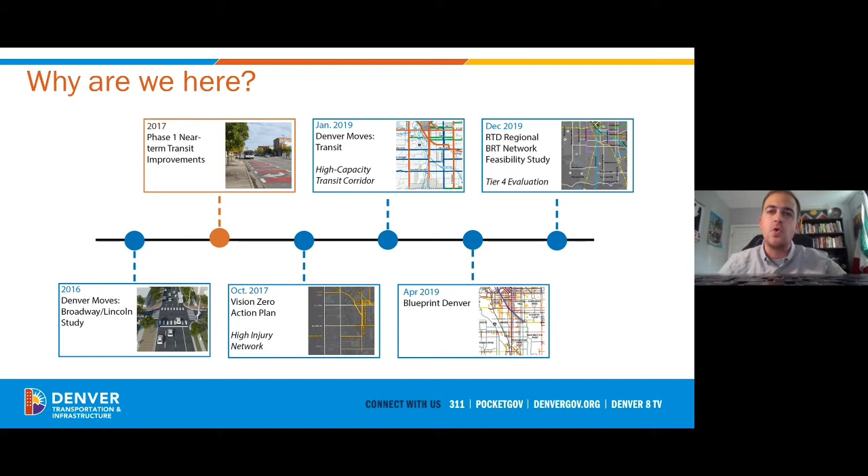With that background, RTD began their BRT study with 23 candidate corridors and narrowed them down with each tier of analysis. The Broadway-Lincoln corridor made it to tier 4, the final tier of analysis, along with 8 other corridors that were the most promising for BRT implementation.

With that, it's showcasing that there are quite a few studies and plans that focus in on Broadway and Lincoln, serving as an important transit corridor for the city, making vital connections as kind of the spine of the city. Next, we'll move into the timeline for the specific planning process, what we're calling phase 2.

I'm showing phase 1 here in orange, the improvements that occurred on Broadway in the northern section of Lincoln. During those phase 1 improvements, it was always envisioned that this section of Lincoln between I-25 and 6th Avenue would be a phase 2. So about a year ago in June 2019, we kicked off a high-level visioning survey.

That was followed by a public meeting and an open house in October, and also another, more detailed survey. That survey provided us with a lot of great feedback and has really helped shape the proposal. Thank you all for putting your time and effort into those comment boxes and rankings—they really helped us shape this moving forward.

It quickly became clear from both our October meetings and the survey results that it was time to engage our Vision Zero team last fall, to help us more thoroughly address the safety concerns being raised by you all in those comments and meetings. So in January, we pulled in our Vision Zero team.

We conducted a walk audit of the corridor, and did an in-depth analysis with the Vision Zero team using the data and what we saw while out on the corridor, along with your comments. We worked with them to start incorporating Vision Zero and safety elements. We paused the transit piece of this project, which is why it's taken us so long to come back—we put it on hold to allow the safety Vision Zero piece to catch up and be an integral part of this project.

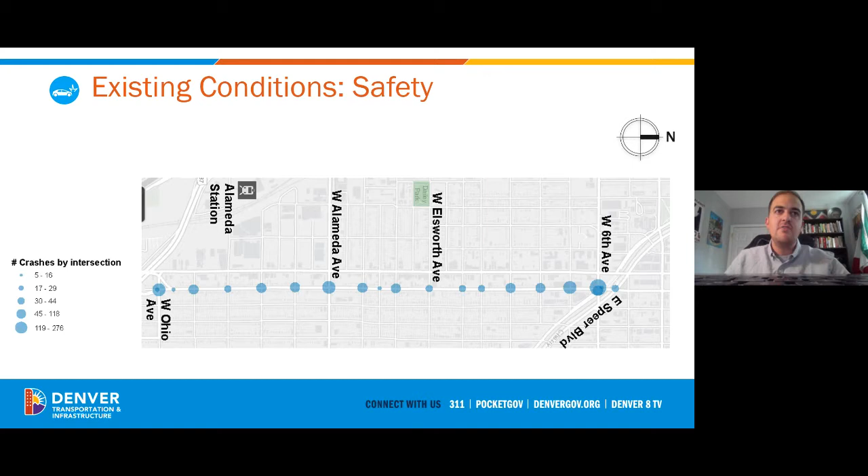Next, a reminder of some of the 2019 baseline RTD data. The Zero, which serves Broadway Lincoln, is RTD's third busiest route, serving about 10,000 riders a day. The Zero, along with other morning rush hour buses on the corridor, means there's a bus coming every 3 to 4 minutes, and in the evening periods, a bus coming about every 6 minutes. So it's a pretty busy corridor for transit by Denver standards.

Also a reminder that RTD is seeing delays along this corridor, especially in the afternoon rush hour when there's no dedicated lane, impacting riders' ability to make transfers and further delaying their journeys. It also impacts RTD's ability to efficiently serve the Broadway Lincoln corridor during peak times. Maybe not a lot of people are moving north on Lincoln at that time, but there's a lot moving south, and those buses really need to circulate and get people moving.

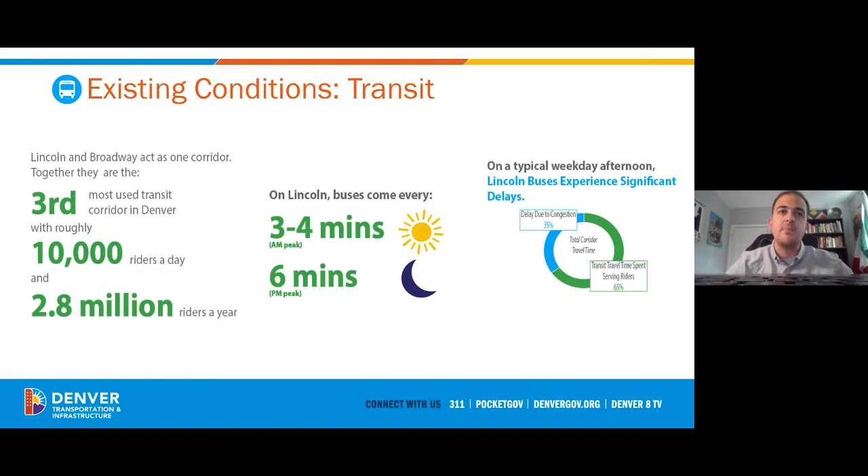Next, vehicular traffic. I added some visuals to help with this slide. It's a busy slide, but essentially it shows the traffic volume on Lincoln throughout the week, day by day. The highlight is we see a morning peak starting a little after 6 a.m. on weekdays, then around 9 a.m. things mellow out and volumes go back down. Starting about 3 p.m. on weekdays, we see the afternoon peak for evening rush hour again, and that's pretty consistent throughout the week, with some differentiation between days.

On Saturday, we see not necessarily a peak, but a steady traffic flow throughout the afternoon. On Sunday, there's relatively lower traffic volumes.

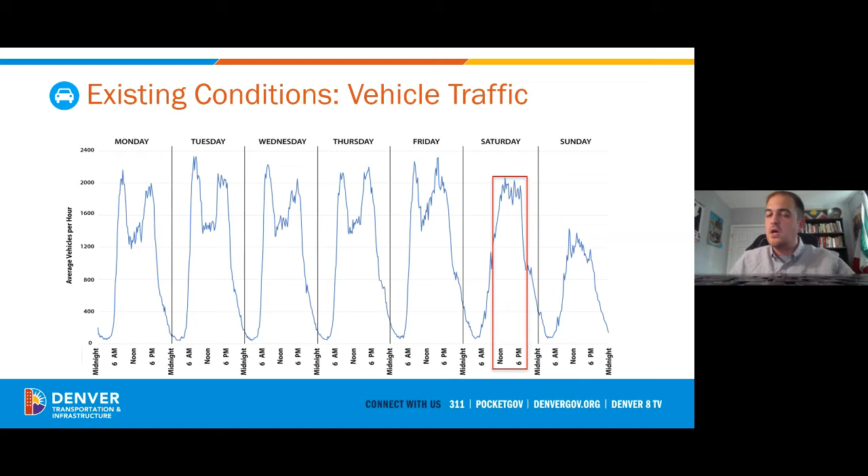Now we'll talk about parking. I'll be brief, I think you all know what's going on the corridor, but to reiterate, because this will come back later, there are existing about 247 parking spaces along Lincoln on the east side of the street between Ohio and 6th Avenue. That parking is available 22 hours a day during weekdays and 24 hours a day on weekends.

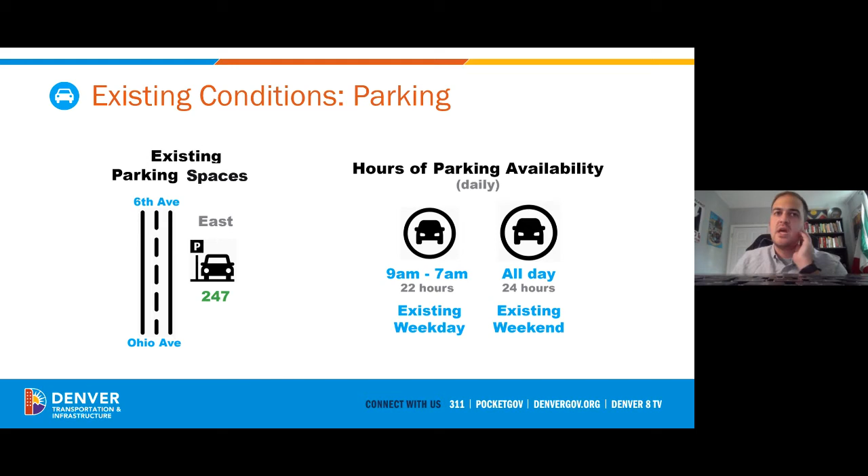So with that, I think there's probably a lot of questions coming in. We'll pause and turn it back to Gabby for some questions before we move into what we heard in the October surveys and how we're moving forward with this project.

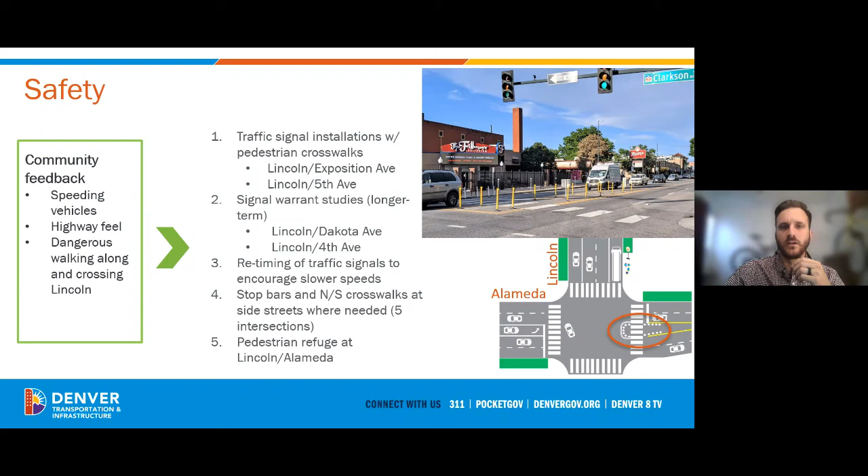Last on this slide, at the Lincoln and Alameda intersection, we had the opportunity to install what we call a paint and post pedestrian refuge at the crosswalk on the east side of the intersection, to help decrease pedestrian exposure to those wide travel lanes when crossing Alameda. This means you have a bit more of a refuge as you're crossing, so you're not fully exposed to all that pavement and all those travel lanes. If you've been in the Colfax area recently, it's similar to some of the Vision Zero improvements we recently installed there. We have a photo in the top right showing our installation from that recent project, and on the bottom right a graphical depiction of what those medians might look like.

Moving on, at 3 locations on the corridor we saw a need for daylighting. This means we'll be removing some parking spots right around the corners of intersections to establish safer conditions, better visibility for turning and crossing motorists, people walking, biking, and rolling. In some cases, we've had to do this daylighting to allow more space for motorist and bus turning movements, when buses are trying to access the side streets.

In addition, we saw 5 locations with current or developing bike and pedestrian safety issues in our crash data. At 3 of these locations - Dakota and 4th Avenue, and Maple - Dakota and 4th Avenue being where we're evaluating traffic signal installations for the long term. In the interim, we'll be installing painted bulb outs to encourage slower motorist turning speeds and improve safety for all users. When we slow motorists down as they make turns, this improves safety for pedestrians crossing, bikes crossing, and everyone in between.

An example of these bulb outs is a photo in the top right of this screen, also installed along the Colfax corridor. At 2 of these locations, Virginia and Ellsworth Avenues, we'll be installing these painted bulb outs along with some hardened center lines, as we're calling them.

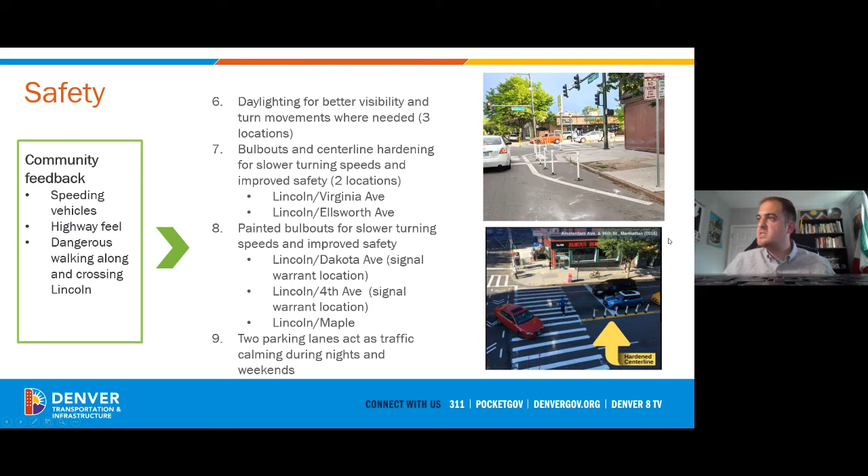Great, thanks Brett. I'll take Brett's momentum there and express my gratitude to the community for using your voice in those surveys. We were really able to use those added pieces of information you provided about safety concerns as added justification for prioritizing these safety improvements.

Obviously Lincoln is on the high injury network, but there are also several other corridors on the high injury network. With your input, we were able to show why these safety improvements should be prioritized here, and as Brett mentioned, secured additional funding for us to implement those safety elements.

Now I'll go through very high level some of the concerns and solutions for what we're calling our street operations - transit, vehicle traffic, and parking. Then I'll walk through what a typical day will look like along Lincoln, and we'll have some more questions.

In terms of transit, what we were hearing from folks is that they didn't think a 24-hour lane was necessary for the corridor - they thought it was a bit much. Conversely, we heard folks saying they wanted a 24-hour lane. We kind of presented the 4 options as they were, 24/7, here's what's on the table. So we had folks saying the 7-day condition is not warranted, please, the weekends need to be treated differently. So we definitely heard you loud and clear.

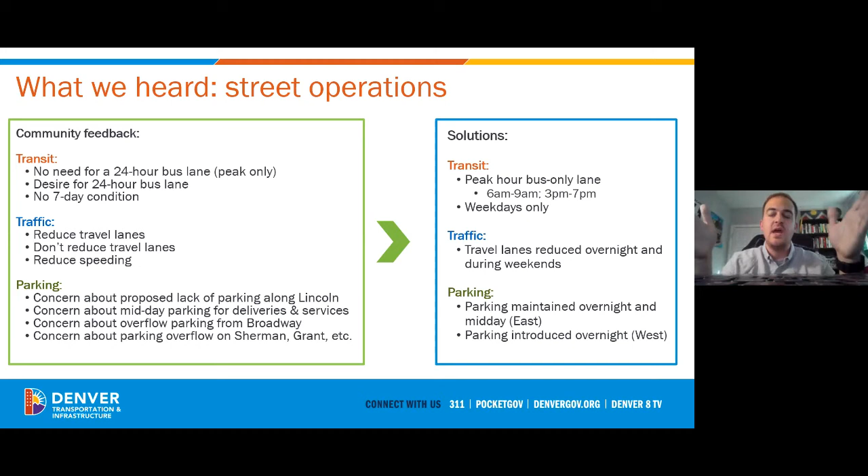So now on the next few slides, we'll walk through what a typical day will look like for Lincoln in cross-section view. In cross-section view, it's essentially like we're standing in the middle of the roadway, looking north at the lanes and each of their designated purposes.

We'll start with the weekday morning rush hour, 6 a.m. to 9 a.m. There will be 3 drive lanes and a bus-only lane. This is the exact same situation as now in that morning rush hour period, but the bus-only lane will be 1 hour longer. RTD needs that lane cleared a little bit sooner — currently the lane is 7 to 9, but it isn't cleared until sometimes 7:30 or 7:45, halfway through that peak period. So we are expanding that AM peak period by an hour, to 6 a.m. to 9 a.m., with 3 drive lanes and a bus-only lane.

After 9 a.m., that bus-only lane switches to parking, accommodating delivery vehicles, service vehicles, and visitors, and that remains in place until 3 p.m. This allows all those deliveries and services to happen in that late morning to early afternoon period. At 3 p.m., we revert back to that peak condition with 3 drive lanes and a bus-only lane.

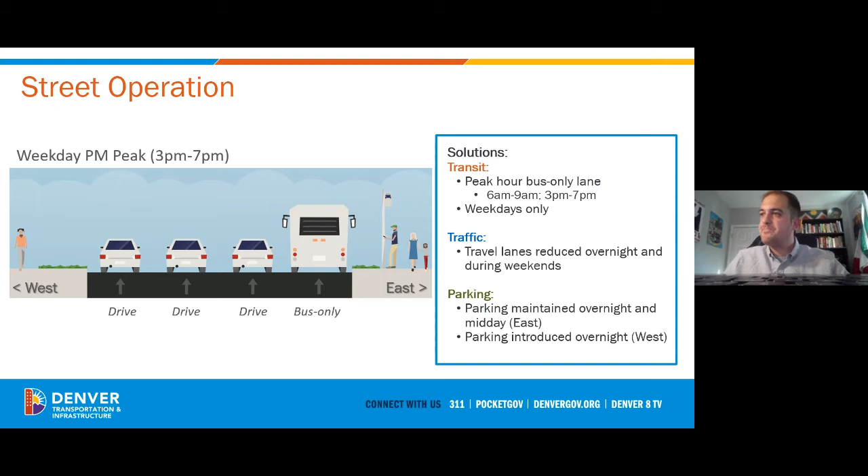Again, that's the same condition that's there today in the morning period, but now from 3 to 7. After 7 p.m., watch the westernmost lane and the easternmost lane — they change from drive and bus-only to parking on both sides. This is where we have that narrowing of the roadway, using parked cars as a buffer for people walking and crossing the street, and to help slow down cars, because overnight is when we see those speeds creep up to some very concerning levels.

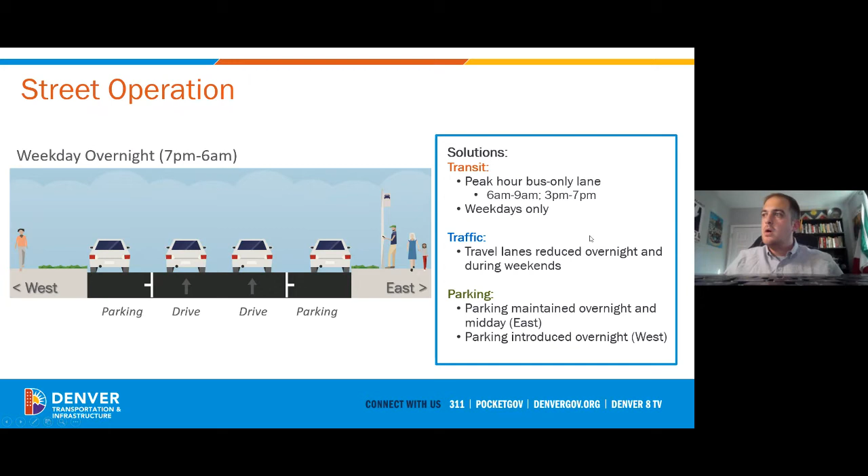The weekend condition is the same as the overnight condition, but we want to spell it out for folks, with those 2 parking lanes on either side and the 2 drive lanes in the middle. This weekend condition essentially begins at 7 p.m. Friday night, so as soon as that bus only lane ends, this kicks in and you have parking until 6 a.m. Monday morning, when it reverts back to the 3 drive lanes and the bus only lane. So while we feel this solution addresses many of the community's concerns, while also providing the city and the buses with speed and reliability improvements, we do also recognize that this is a little bit complicated.

This is a solution that is new for the city, something we haven't done before, but something we thought merited consideration given the community's concerns and the unique nature of this corridor. That being said, we'll definitely monitor this condition over time and make sure it's working and functioning, and if we need to make tweaks and adjustments, we can look into that.

But we felt that a lot of folks were saying we need the peak only bus lanes. We really want that midday parking, not only for those deliveries, but just so there isn't 4 open lanes of roadway in the middle of the day, when the buses aren't coming as frequently and you essentially have that lower volume in the middle of the day, as we talked about earlier. So again, just recognizing that this is kind of a new condition for the city, and we'll definitely watch it and monitor it over time.

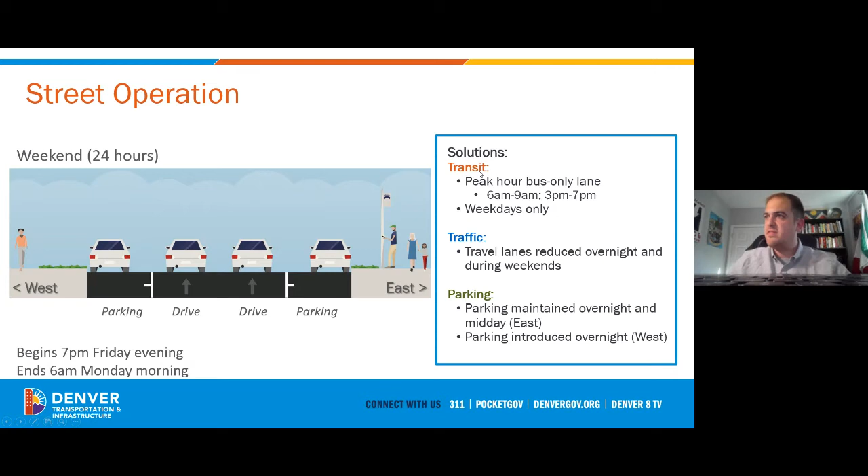And with that, I think... Well, oh sorry, nope, one more. Sorry Gabby, just bringing it back a high level really quick.

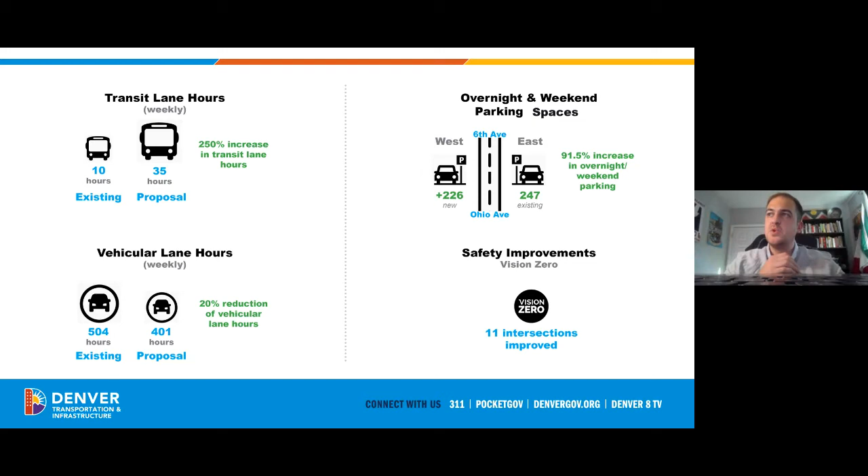Just showing you, again, these are almost the same as the existing conditions. Some of them match the graphics we saw earlier. But just letting folks know that currently we have 10 hours of transit only lanes on Lincoln. We'll now have 35 hours in this stretch per week, and that's a 250% increase in transit only lane hours. So that's a huge increase and helps get those buses through in the times when they're really stuck.

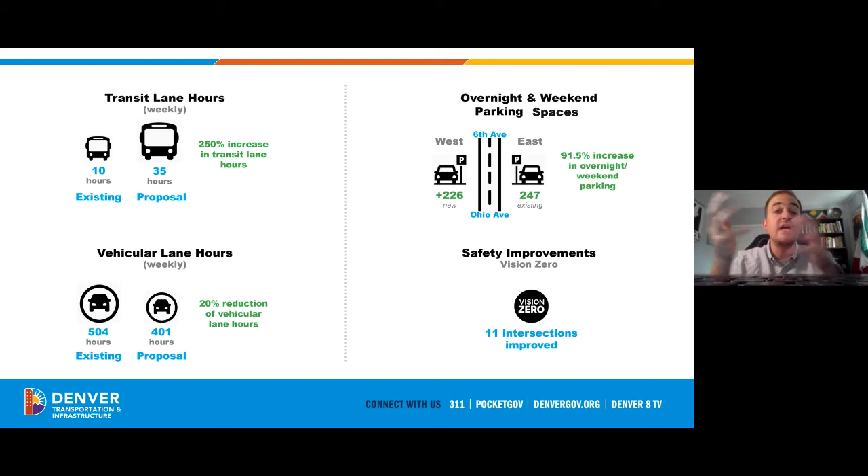Vehicular lane hours will be reduced by 20%. But again, this is during those night and weekend conditions when the volume data shows that Lincoln can function with just those 2 lanes. It's almost a right sizing, we'll call it, of those vehicle lanes.

That overnight and weekend parking, again, you still have those 247 spaces on the east side of the street available to you overnight and on the weekends, but then there will also be approximately 226 spaces added to that west side in those overnight and weekend parking conditions. So that's about a 92% increase in that parking capacity. And then, as Brett mentioned, there are several Vision Zero improvements happening along the corridor, and with that additional funding we've secured, we're able to improve 11 intersections along the stretch of Lincoln.

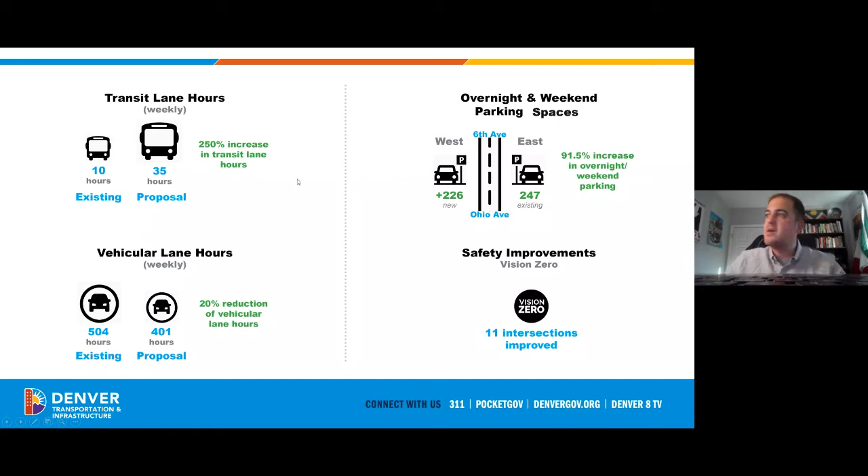So now with that, I'll turn it back to you, Gabby. All right, the team is ready because we definitely have a lot of questions. And the presentation ended, I'm not sure why.

So let's jump in for a question from Martin to Ryan. Will you be opening a fund to support repairs to the foundations of adjacent homes due to the additional vibration from passing buses?

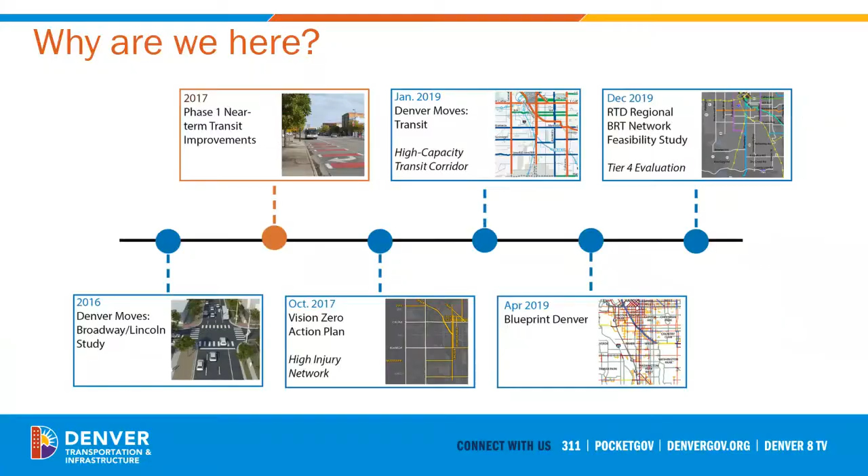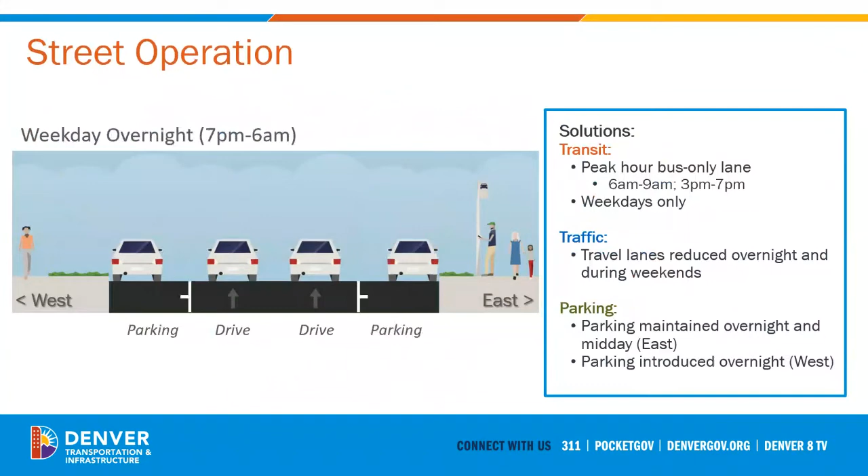Yeah, so there's no funding available for mitigations related to buses and the vibrations associated with those at this time. It's obviously something that we want to continue to monitor, but we don't have specific funding in place for how buses affect houses, as that lane is currently being used by buses.

All right, question number 2, from, I would probably say Zach or Scott may be able to answer this one. This one is from somebody that wanted to stay anonymous. I live on the west side, commercial and residential of Lincoln, within the 400 block. And the only parking that we have is limited, so we all, for the most part, have to park, receive guests, get deliveries, and have workers get done on our homes via the parking lane.

How do you expect us to function without parking? I guess the proposed design would actually add parking. So Zach, would you mind going over a little bit again, specifically for that southern segment, what are we looking at for parking? Parking on the west side?

On the west side and just our southern side in general. Okay sure, so yeah, parking on the west side will be added. Currently there's no parking on that west side of Lincoln. There will be parking added on that west side overnight, so from 7 p.m. to 6 a.m. And then on the east side of the street, where there's currently parking 22 hours a day, you will still have parking overnight, and then in the midday period from 9 a.m.

Until 3 p.m. And then the side streets still retain their parking, except near the corner where we're going to be daylighting - pulling back the parking spaces a bit so there's more room for folks to visually see pedestrians or bicyclists along the corridor. Hopefully that helped answer the question, Gabby. Yeah, I think so, thank you.